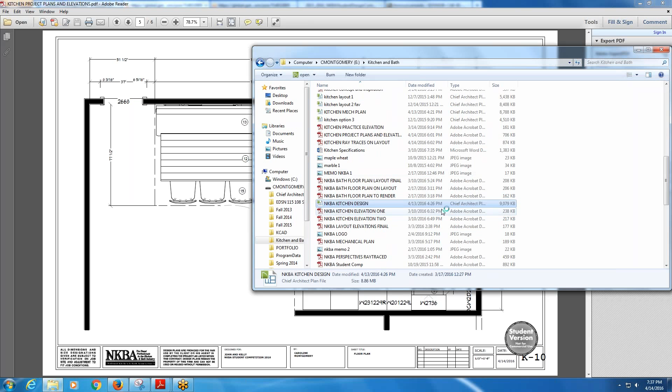Let's talk about what was wrong. Let's see, because I don't think we got to cover that because somebody was absent. It wasn't me. I know I have it on my laptop, so I could go get that. Oh, here maybe, I think I have it if you don't have it, probably saved as a submission link.

Okay, here we go. So this is where it was, and some changes have been made. So this originally was like 48 inches, so pretty much right here, and I shortened it to 36, so I don't know if that'll be enough room or still not, but with 36 inches it leaves 18 inches here, so I don't know, it still might be a little not big enough.

So I placed my sink here because I wanted it centered on this wall, and then I put my dishwasher on one side and my microwave under the countertop at 15 inches above finished floor, which Allison thought was hilarious.

So the problem is that I don't have 21 inches of standing space on the side of my dishwasher. So that made me have to reposition my sink so that I could allow for that. And my island was a little bigger, so then I didn't have quite 42 inches on some of the sides, so I made the island smaller to get that proper space.

And then this is my refrigerator, it's paneled front, and then this is my stove, obviously. And this is the longest triangle of the workstation, but it's not 9 feet, it's like 8 something, so it still does meet code.

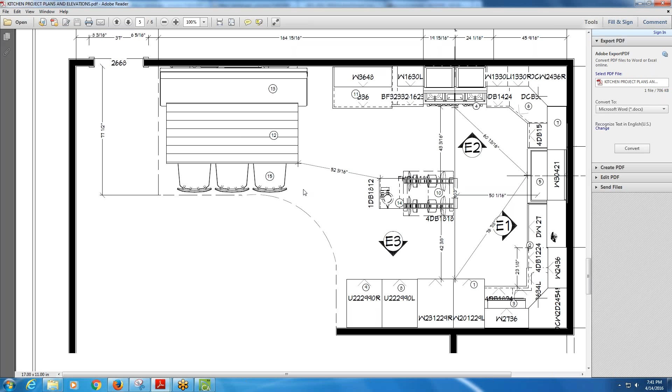Is that good, Allison? Should I move on to a different plan? Yeah. Okay, so then I have my mechanical plan, which really is probably easier to see if I open it because it has color, because I should have saved that one as color.

For anyone else using Chief Architect, since in the drawing standards the cabinets are kind of lighter, I saved my mechanical plan as a different file, and changed the default setting for the cabinets to be no fill, so that makes it easier to see the switch connections. I equally spaced my recessed lighting for the most part, and put it right on the edge of the counter because I read that was a good place for it.

Then I have a switch that connects all of these. I have a garbage disposal switch and GFCI, GFCI, GFCI, and then a light for my pendant that can be controlled from both sides. This is the wrong legend on this one, but I have the right one on this one. So there's my little legend for the mechanical plan.

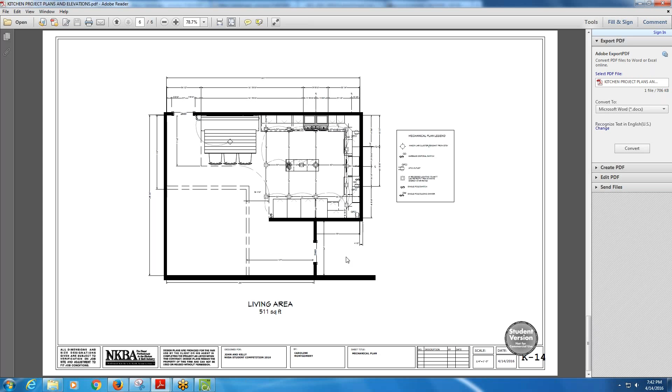So, to my elevations now. Here's my sink wall elevation, so you can see how it's uncentered. I think it's all right though. I have these floating shelves, and this is a mirror, so it looks like a window, but it's a mirror.

I thought that would be a nice thing, so it's not like she's just staring at the wall when she's doing dishes. She can keep an eye on what's behind her, and it kind of opens the space up a little bit. Then floating shelves, which would have accessories in them, maybe some cute bowls and mugs and flowers or something.

Then this is the dishwasher. I wanted both my other appliances to be paneled fronts, like to match the cabinets, because I have this blue vintage looking French range, so I didn't want them to conflict with that. The Lazy Susan, and then this is the cabinet that goes to the countertop, and here's the microwave.

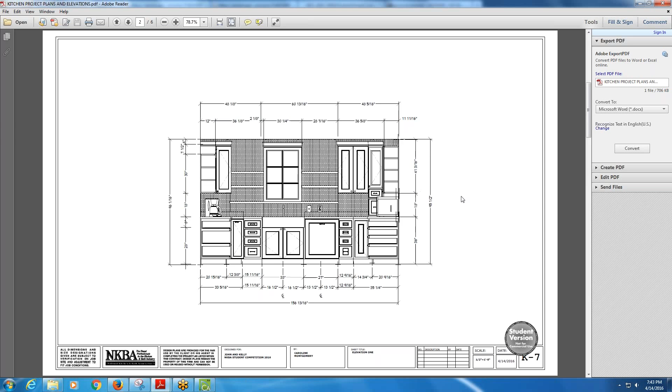Then here's my last elevation. Here's the microwave, so you see it's tucked in there nicely. And then this is the refrigerator, side by side. So I have it center-lined, and then I dimensioned the width of each door because they're not the same size.

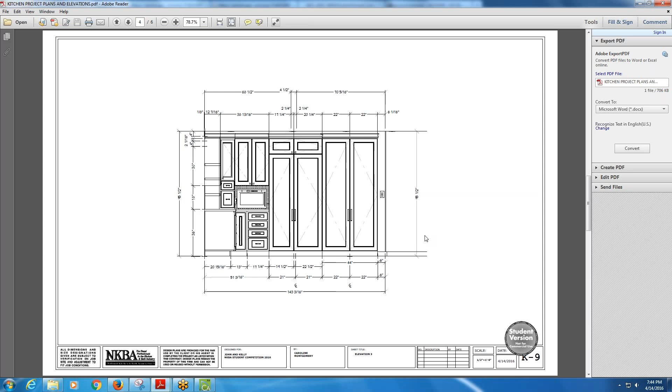And then this is my pantry. So one side would have shelves in it for storage, and the other side would have maybe just a couple shelves up here, so they could put a full-size broom and something like that, so they could have room this way, and then just shelves at the top. So those are my elevations.

Do you have anything you want to say before I move on to my perspectives? Nope, I think you're doing fine.

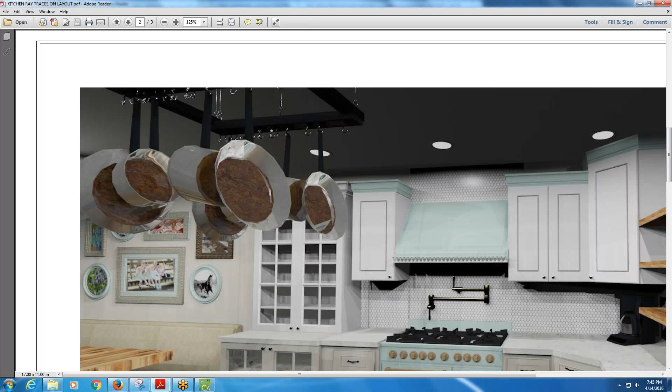So here's that view, and you can see the shelves, like some reclaimed wood to match the table on the island. And then I did a perspective floor overview ray trace, which I didn't know that you could ray trace this view, and you can, so that's really cool.

Yeah, I think it looks okay without the sink being centered. That really was bothering me when I thought, oh, I have to move this, but it doesn't look bad. Okay, so that's all I have.

I guess the only thing that you're missing is that they had requested the extra counter height seating for people to be at the bar, but that was optional. They said if you had space for it then yes, but if not, it was probably the last thing, the thing that could be cut, so that's up to you. But it looks good.

Do you think that 18 inches there is okay? It's better, but if you imagine it, I would say it's still really small. It's better than before, for sure. So if you have to change it—or I'm suggesting you change it—any type of change is better than what you had before.

Usually, even 30 inches is the minimum space we'd give to walk through into a space or between panels, or if you're really pressing code for somebody to get through, move past an edge by, 30 inches would be the minimum. But it's better than nothing. I mean, a kid could get back there, so at least you're giving another access point, but I'd say it's still cutting it fairly close.

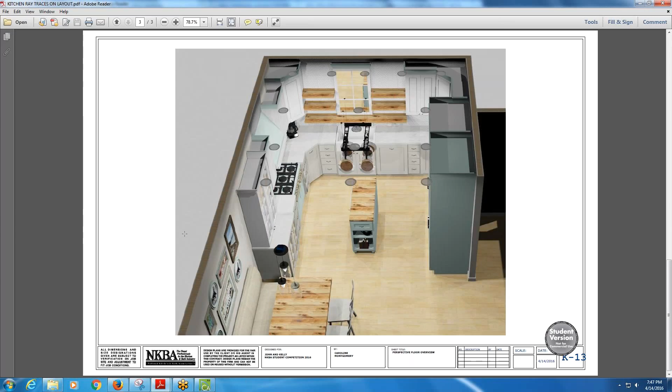Very nice, family photo. That was really clever. Then I have these random horses that just came in the frames, so I thought I'd put their photo in there. It's Schoolhouse Charm, it seems like they'd like horses - they literally do? I think so, they like outdoor sports and horses and things. So, very well done, good job correcting everything.

Let's see, I wanted to show you what happened to my SketchUp too, but I can't right now. Which student said that?

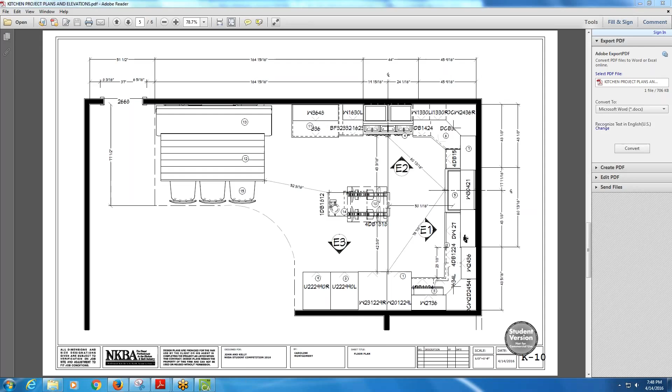Oh, Madeline. Okay, I was like, well that could have been any of you, almost. I emailed you back, Madeline, but if it was another email after the one I sent you saying - what was it crashing? Was it crashing from school or home? Oh, there's way more to this. Hold on. Computer can't access, can't open anything. All right, we can talk about it after class, but it's good to know.

I'm going to go ahead and let Gabe present next, since he had quite a few changes to make.

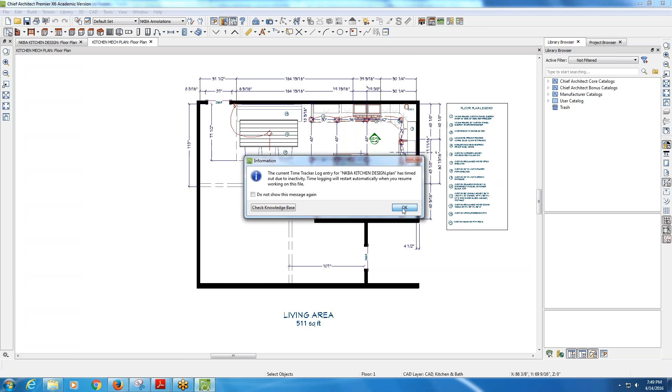Hey, what's up with your countertop in that picture? Does the hutch protrude out? It does a little bit, it's a little bit larger for some reason. If you look at this, but I could make it more shallow to match that. It doesn't have to, but there's another case - does it have a rounded edge and it's just not showing it? It does. Oh, it's so bad at that. Okay, well then I'm okay with it. As long as it's a rounded edge, it's okay.

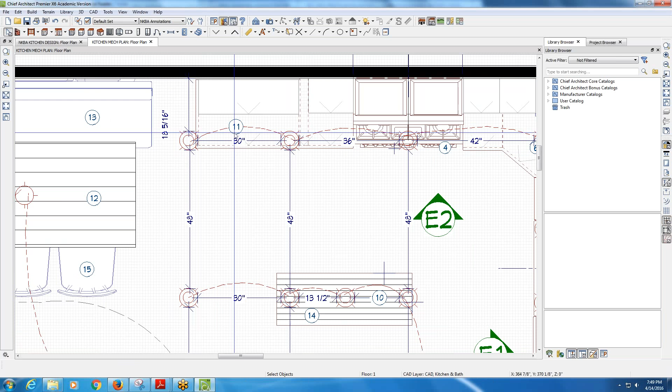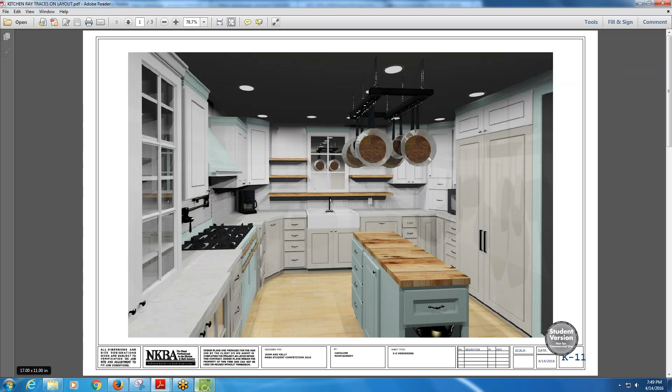Okay, he's going to use my headset. There's a bunch over here, but okay. Not, I even left mine. I had an extra. He's setting things up. You know Gabe, you'd think if you were efficient, you would have already been ready. True. All right, he's too busy doing his homework for other classes.

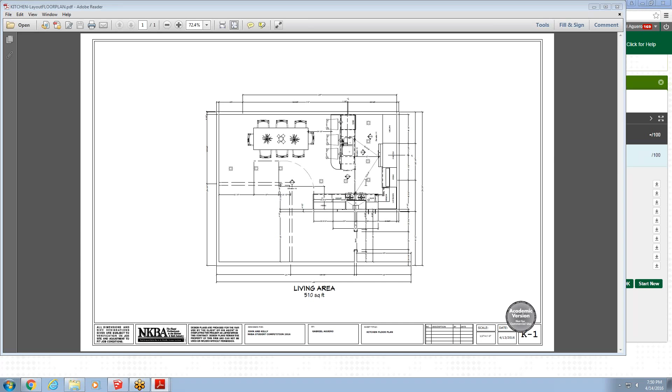Thinking, all right, lab people, let's see what you got going on. Look, he even has accessories on his table today. All right, let's see the changes and explain them slowly. Zoom in a little bit too for me - even I can't read that.

There's the picture, Caroline, the 15-inch minimum space. Oh, that is so dumb. Okay, what's going on? Just the rule about the microwave oven placement needing to be 15 inches above finished floor is ridiculous.

All right, Gabe, go ahead. Well, I changed the whole kitchen because you said so. That's good. Well, I used an L shape. It's considered a U shape, right? Well, a U shape with the peninsula.

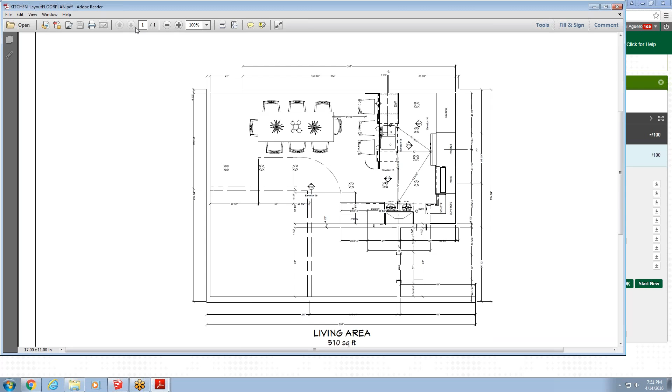So yeah, let me close it because I can't see, I'm literally blind. So you can see the triangle over here. They're basically like under the 90, 100 and something. Yep, you're good. Yeah, so I'm good on that.

What else? There's the dimension, the center lines. I wasn't sure if it was 39 inches with the chairs. Usually you'd want at least 42 probably - there you'd be edging by, I wouldn't see anyone walking back there. And you have open access on the aisle. You're all secretly cutting it real close with the chairs along the wall anyway, but I'll let it slide for everyone.

Let's see, for between the chairs, how much would I like you to have? So it looks like you're okay for one person at 32, 36, and you have 39? Yeah, you're fine. I'll say you're fine because it's secondary seating for the stool, and while it'd be nice to have guests up there, you could probably fit 2 people and have one person still sitting at the table, so I'll let it be okay. Thank you.

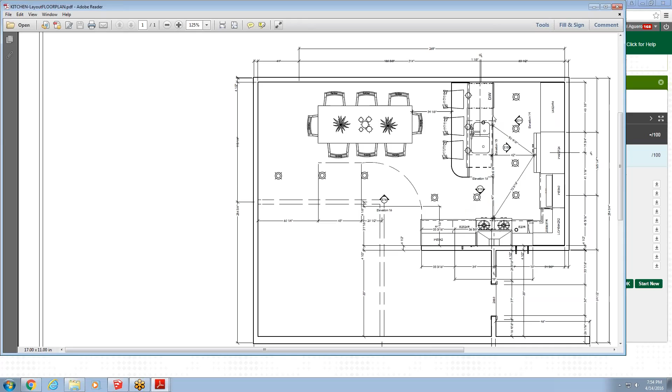Let me check one thing. And by one thing, I mean many things. Oh my gosh.

Okay, doors are fine. Triangle's fine. Separating work centers, you're fine. You don't have any tall items separating your work centers.

Where's your refrigerator? Remind me. Right here. Okay, yeah, it's not in the middle of a work center necessarily because you have the broom closets. You're okay.

Work traffic triangle, no, that's fine. 42-inch aisle is fine for the one person that's working back there. I'd say the 40-inch right there is cutting it close for right in the aisle to get into the kitchen.

Where it's 40 inches, well that's the minimum, right? I think it's 42. You think it's 40? Yeah, I read that it was 40 too. 40 also, yeah. Is Caroline joking that she thinks it's 40? No, she's not joking. Hopefully not. She is. It's 42. But anyway, I'm sure you can make one of those cabinets 2 inches smaller.

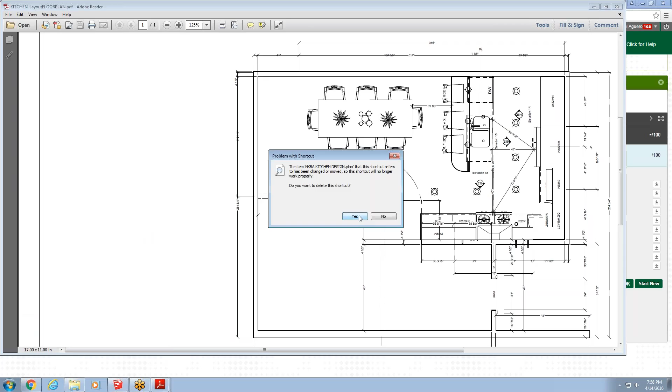If any of you want to look through the rules right now, or if you have anything that you feel—it makes it sound like a therapy session—but if there's something that you don't like about the plan, just note it in your folder.

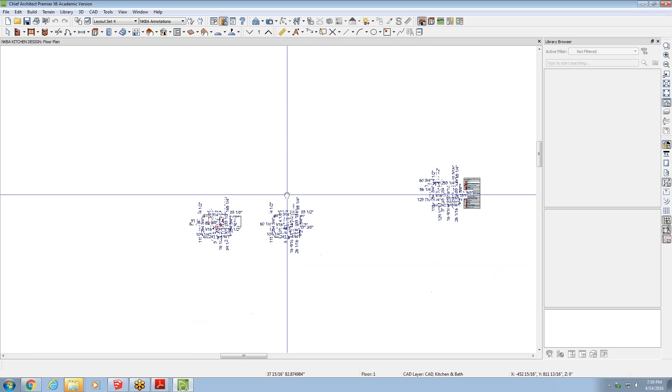While we're waiting for Gabe — Tim, you'd mentioned before that you can't fit everything on your plan at 1/2 inch scale, and Caroline confirmed that's true, especially with having a legend. So she's been doing hers at 1/4 inch scale, although for their competition I think they might allow that. They didn't specify an exact scale, but said if you weren't able to fit the 1/2 inch scale, another scale was okay. They just didn't say what. The 3/16 wasn't an option, so 1/4 inch is fine. Or maybe 5/16.

30-inch high — so is it counter height, Gabe? Or does it come up? Is it bar height or counter height? It's the Kerner — I can't pronounce that. It's counter height, so it matches the counter. Or does it go up a tier?

Let me see — yeah, you can see. So it's flat, it's counter height, yes.

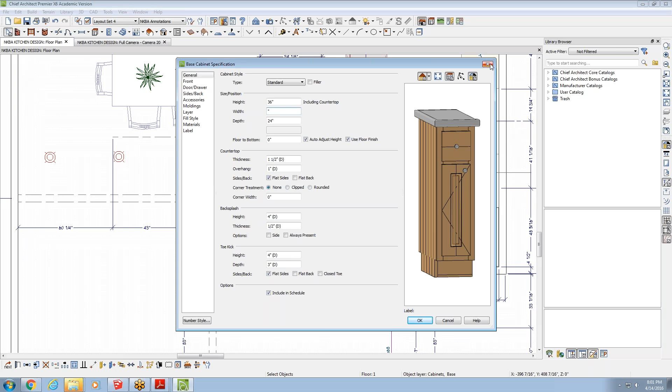I have a quick question. I'm looking at my refrigerator now — I'm doing that thing where I'm listing all my appliances and everything. I didn't know they had it, but there's a cabinet depth option. They have one that's 24.8 cubic feet, that's the French door one I have, and they have one that's 19.8 cubic feet — that's the French door cabinet depth one, which stops at the edge of the cabinet. Should I do that one instead? It doesn't matter — if you do the cabinet depth one, you have to worry about the spacing to the side of the refrigerator on the pull side. They're not concerned about that when it's not cabinet depth. Okay good, I'll leave it the way it is then.

Good, I have to do another ray trace. Yay.

Now what are you doing, Gabe? Oh, you're changing the size. So there's that little cabinet — so you have two of them? Yeah, one I think they changed for a drawer. I don't know what to do.

Looking at your drawing, I do think you have the wrong height stool — you have a bar height stool at a counter height. You could modify that easily. Really? Because it looks like they'd have about 2 inches for their legs shown. So it will actually be shorter, not taller.

I was looking at your dishwasher — you said it was not 18 inches. How many inches was that depth? 16. And there's 3 stools, 48 spaces, 30-inch high tables and counters — no, we're higher than that, 36. Allow a 24-inch wide by 15-inch deep knee space, so you're fine with that since 15 is the minimum suggested for that height. 24-inch spaces — I'd say you're fine with that for each of those stools. For 42-inch, allow 24 by 12.

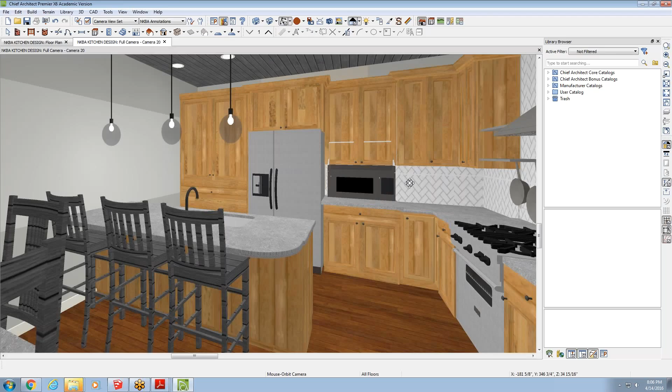No, seriously, do you want to see the picture? Sure, look - it's like a microwave, like something is hanging in the top part of this. Is it a vented one and that's the vent that's attached to it?

No, wait a second. Oh no, I will take that out then. I don't care, whatever it takes. Okay, yeah, so you're okay with that.

Where's your trash storage? Here, and in the end over here. I feel like that's really far away from where they're working, where their prep area is. Of all the things to be breaking, it's not the worst, but it is rather obnoxious to have to walk out there if you're cutting something up, then walk all the way to the very last cabinet every time you need to use the trash can.

But he could put it under the sink. I'm sure they are going to store lots of cleaning supplies underneath the sink. He does have quite a big cabinet to store brooms. What's the cabinet look like? Is it just a double-doored cabinet, or are there shelves in it? Does it tell you that information for the brooms?

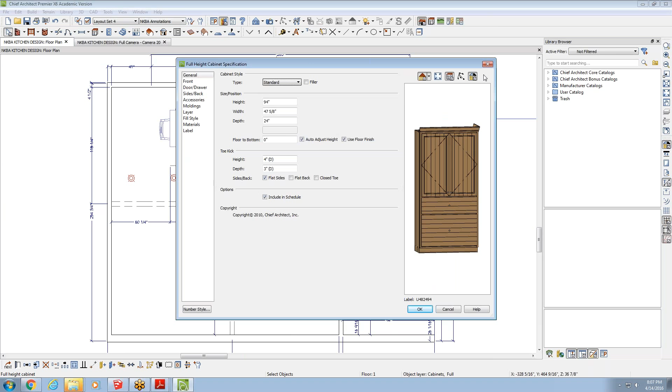Oh, you can modify it. Then maybe if you did modify that cabinet to have more shelves on one side and open broom storage on the other side, allowing you to leave the space open under the sink - although you're not going to have a very tall trash can with the pipes underneath it, you really won't have a lot of space. Right, but let's think it through.

What's under the sink by the refrigerator? Next to the refrigerator where the microwave is. It's just two double open cabinets. Yeah, you could put your trash in there. It's prime real estate, but it is prime real estate.

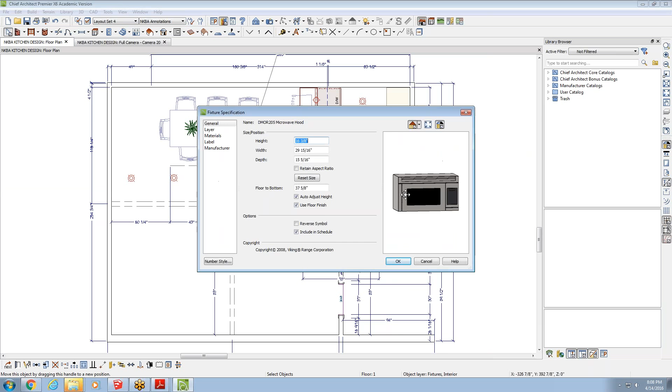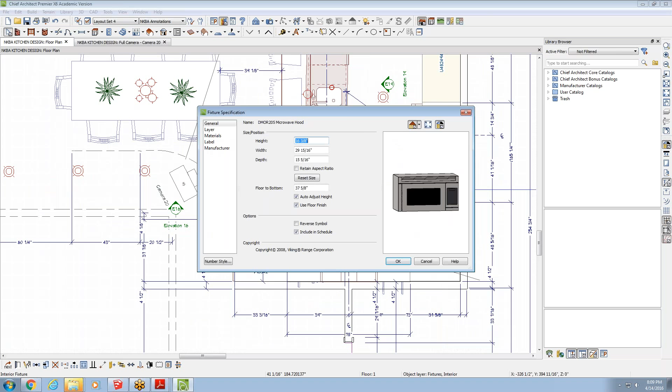One thing I'll be honest with you guys about: I do not have the time to sit around and count all of your drawers and cabinets and make sure that you're meeting all the codes. So for the most part I can tell just by how many cabinets you have within the space if it's going to be enough for the family size. This seems like if we devote that to the trash can, then we're losing quite a bit of usable space, because the rest is taken up with appliances in the base cabinet, and the range takes up a good amount of the space for the overhead cabinets. It wouldn't have a lot of storage.

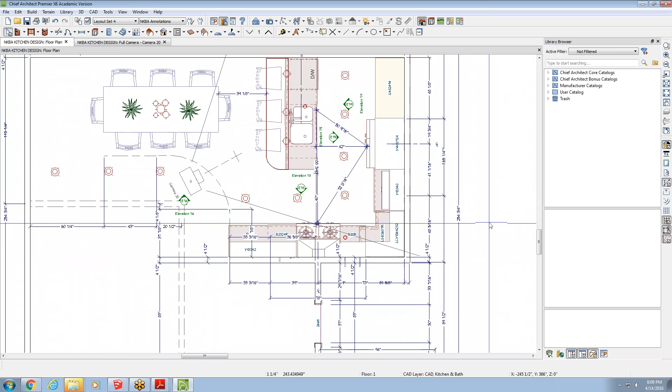I was saying you can check yourself and do all the math to figure out how many shelves and drawers you have, to figure out if you have enough space for the maximum size of your kitchen. But I'm not going to take the time to do that for everybody this semester, so I usually do it by thinking of it just logically - thinking about how much of your whole sink or peninsula area is taken up by an appliance, like this much is dishwasher.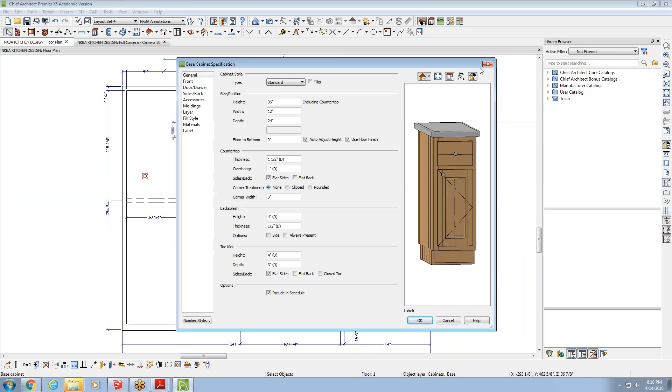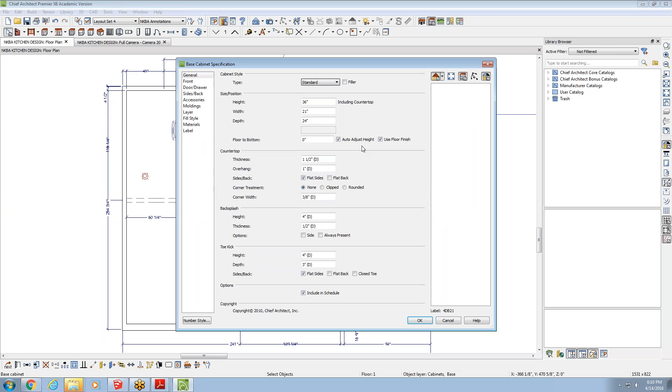Then what's next to your sink? Is it drawers? I would think you'd want some drawers. Okay, so you just don't know how to do that - that's okay, these are just suggestions, I'm not angry with you or judging you on that, we're just figuring out space. So if you don't have any drawers, I think you'd want some for spoons and utensils of all types. So we're going to want to add that in.

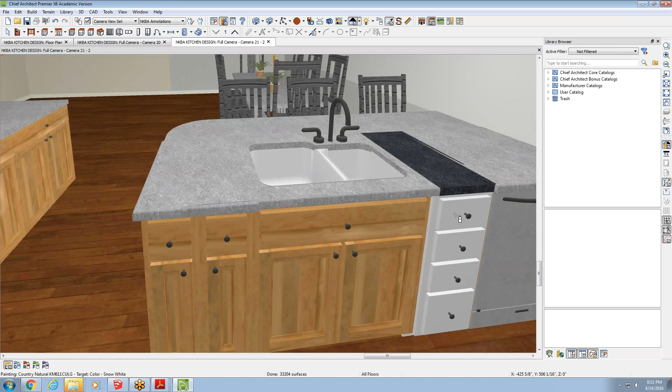But then, if you think about this peninsula, there's really not that much storage in it because you have the appliance, you have your sink, and then at the end you have two places for cookie sheets or trays, which, while necessary, I don't know that you'd store that many of. You do have drawers at the top - are they false drawers or really drawers? Okay, good, well at least you have drawers, so that's adding to your amount of space. But just imagine that whole island almost doesn't count as storage except for the drawers.

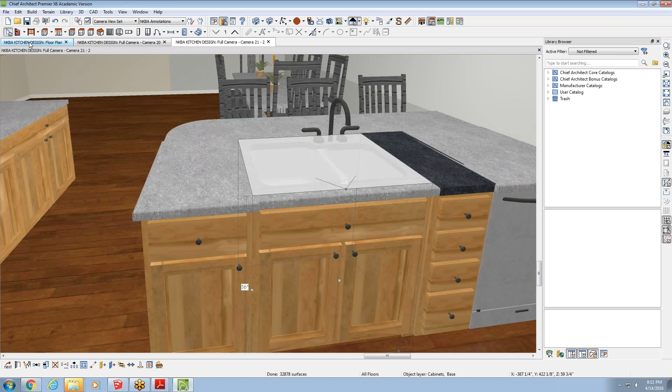Then on your wall you have quite a few doors on the bottom, but they're all towards the outside of the kitchen.

Can you give me an elevation of the wall that your oven or your stove is on? Speaking of ovens, they said if we have a range with an oven in the bottom, we don't need a separate oven, right? This one?

Mm-hmm, okay, I believe that was true. There's your vented hood, two doors on the bottom. I guess it's not bad. I'm not going to fight you over it.

So what's going on? Then you have shelves. Could you add, I know you're not going to love it, but is there space to add more upper cabinets in those empty spaces by the... here? Yeah, oh yeah, yeah, I can do it.

Does anyone agree that for the size of the kitchen and how much is taken up in the usable work triangle, he might want some more storage in there? Or would you leave it aesthetically as it is?

I'm going to call you by name. Tim, what do you think? I don't know, I'm still trying to decide whether it would make it too crowded, because I think it would. I don't know, it would change the aesthetics. I kind of like it open. Okay.

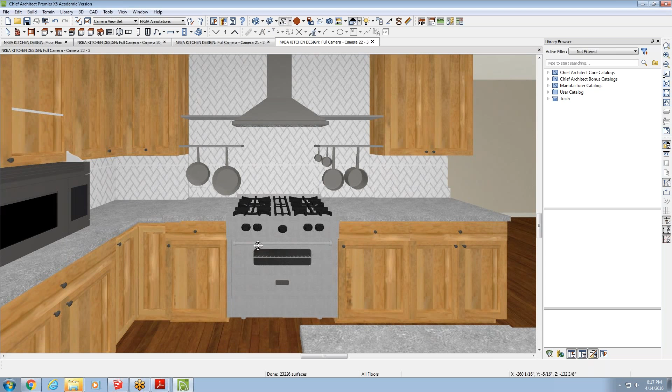So you're okay. Now go back to the other view. Why did you guys screw me so bad? No, you're doing well, look how much you've improved. Really, we haven't changed much at all.

At least 30 inches of clearance is required between the cooking surface and an unprotected combustible surface, but we have a hood, so allow 24 inches between the cooking surface and a protected non-combustible surface. Perfect, you're fine, you have 26, you're okay.

Cooking surface, ventilation, that's fine. Nothing with the window. Your microwave sitting on a surface isn't ideal, but if you have to break one, that's okay—it's better than 15 inches above finished floor. So, microwave landing area, yours is sitting on top. Provide at least 15 inches of area above, below, or adjacent to the handle side of the microwave oven.

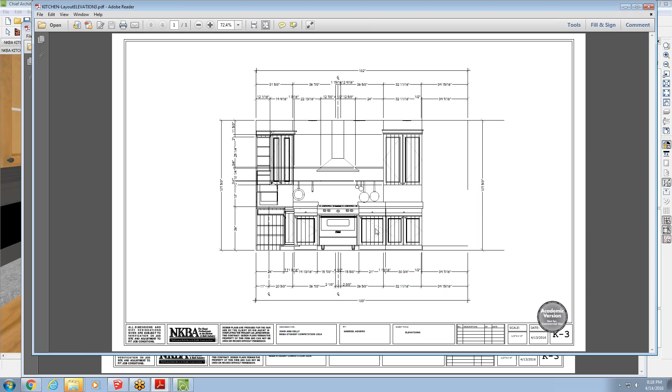You want to see the elevation for that? Hold on. 18, I don't know—oh yeah, you're opening out that way towards. I think you're fine.

15, oh here's the sit-on-top. Yep, there's the 15, there's your thing. You're fine.

Combining landings, try not to concern you with that. 36, 36.

Okay, a total of 158 inches of countertop frontage, 24 inches deep, with at least 15 inches of clearance above is necessary to accommodate all uses. So 158 usable counter.

You have 36, go back to your plan view for me. For plan, right? Yeah, so you have 36 and about 24. You're really 60. You don't have a ton of counter space, but it's okay.

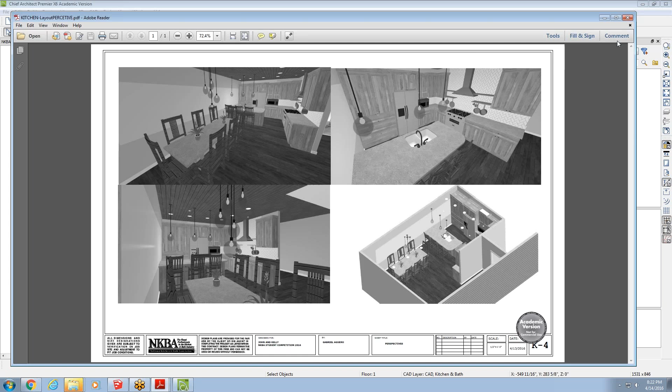I like your ceiling. Alright, yeah, I switched to wood instead of the wallpaper or ceiling paper. Yeah, it gives it more, it looks better. I don't know, it looks better to me. Yeah, very nice. Okay, well, let's see.

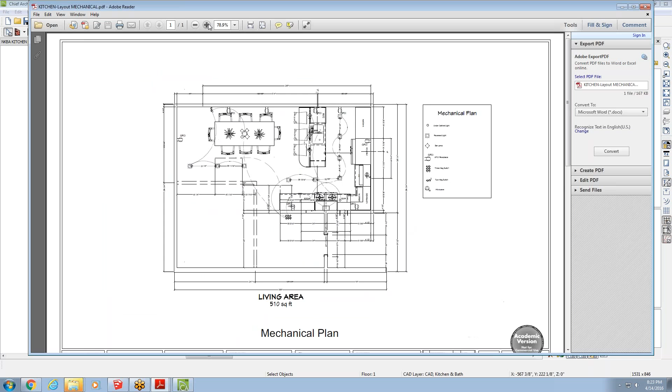Where's your mechanical? Let's just check your lights. The other one we didn't get a look at—we looked at everyone's last week. So there's your S2, did it prompt you to do an S2? What's that, where it says two-way switch?

Oh yeah, so there you're going across. I don't understand what the two-way switch is doing, is it just me? Oh, you don't know what it's doing? No. Oh, it's going for the chandelier and then the 3 for the hallway. I don't know if you had to do those the whole way.

Well then how is it going? So the chandelier in there, and then it connects to the other one? Yeah, because this is a 3-way, so it's going through to the chandelier. The same, the 3-way is going to the chandelier as well. But I don't know why it looks like that.

I don't think it... did it automatically do the S2? Okay, I think it's an S3, and it just seems weird. I was just having this discussion with Kayla at work today that no one really knows when to use the S2. Anyone know when to use the S2? I don't even know what that is.

I'd stick with the S3, because an S3 has two circuits that you're switching back and forth, and one that it can switch to when it's not in use. So the S3 is what you want in this situation, where you have one switch on one side of the room and one on the other.

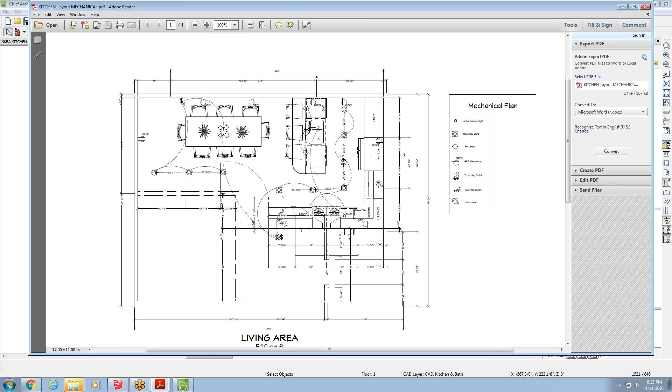You've got the ones in the middle of the island—where are those being controlled from? For the three-way over here? I don't see them connecting. Can you zoom into that? Oh, they're not connected.

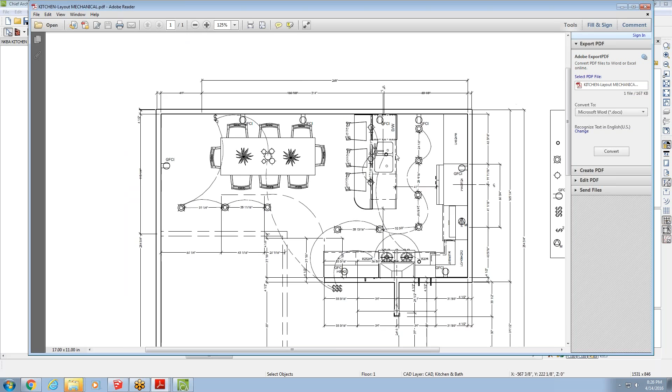Alright, go ahead and... switch on the one by the island instead of behind it. Because they'd have to go back between that little tiny space to get back there by... you mean on the cook side of the island, a switch, or on the seated side, Caroline? Yeah, I feel like I'd like it in the seating area.

No, the seating area is fine. We're talking about why wouldn't you put the island lighting switch by the island, so if you were sitting at it you could flip it on somewhere in there. I don't know how often you're going to walk back behind there to flip it. I feel like that would be one of the first ones I'd flip when I came into the room you're at right now, just turn them on or off maybe.

What I was thinking is connecting the two lights that are here, like by the stove, and Caroline told me this light isn't necessary so I'm probably going to take that out. So it connects with those—you'll end up having this one, then all of those, around to this guy and then all of those. Yep, okay that's fine, just connect them.

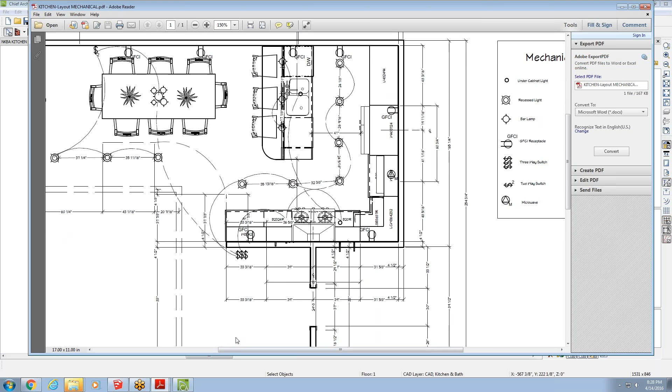Let's see, other than that, I see how that's connecting. We fixed that—I think we've beaten this one into the ground, Gabe, we can move on. Finally, I do something good. You did, you did good. That's what space planning is all about, working through all the different situations. Awesome, and getting your money's worth.

What is that, the current time tracker log entry? Chief Architect will log how many hours you work in there.

That's really cool. You guys should have that tracker for your homework, and then you could send me a file that says... you'd probably sit there and just shake your mouse while you watch television. I spent 17 hours. I know some of you do, though.

Sound good? You're good. I'm going to call it. Right, good. Bye. Just, 1, 2, 3, 4, 5, 6, 7, 8.

I think you're cheating with the chair on the end there. It probably goes past the boundary line. This guy? Yeah, I bet that's past that dotted line that you don't have shown there, towards the door. I'm just saying.

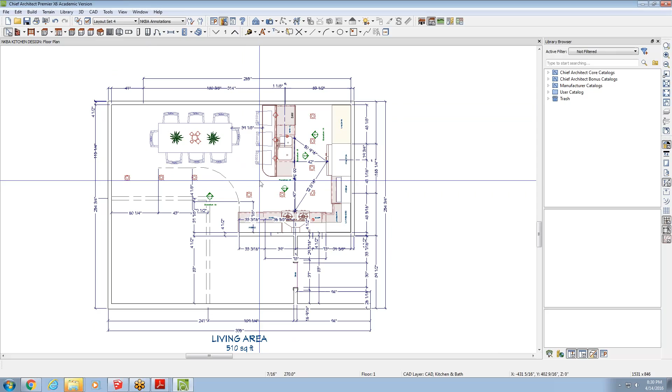I think it's definitely, yeah, it feels like a Monday. But anyway, yeah, I got a case of the Mondays. Maybe it feels like it should be Friday. All right, we'll move on.

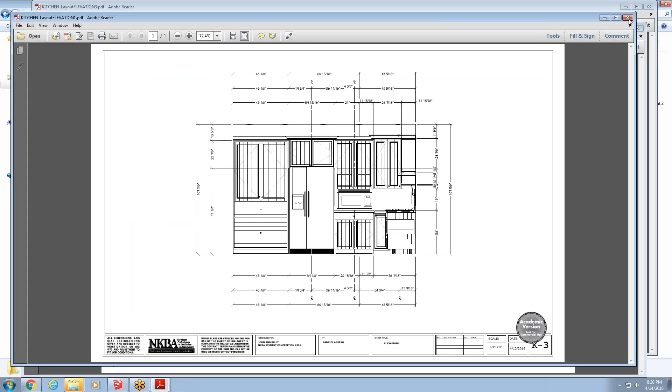Madeline, do you have anything that you've worked on since we talked last week? I know you've been having some issues with your computer, and I know that was more SketchUp, but do you have anything that you've hand drawn, or how were you trying to draw? We were still hand drawing it, correct?

Did you have anything you'd like to share, or do you want to wait another week? Okay, that's fine. Let's see.

Tan, did you make many changes? Yes? Okay. Did you want to share some of them? I'll go ahead and give Tan the presentation rights. Tan.

You don't have to, there's another set. Those are nice and warm already. Oh boy.

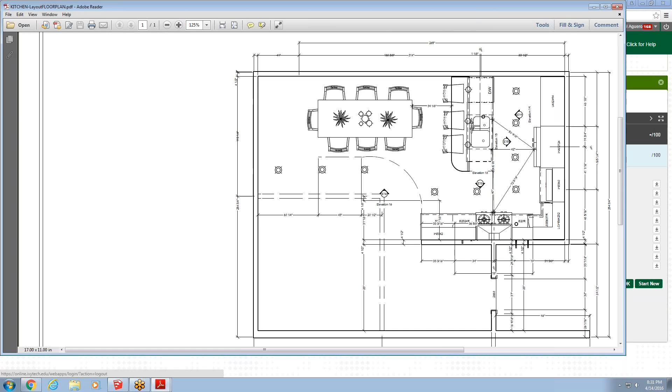There's Tan's layout. Oh, those are interesting. I like the drawing you made with your mechanical lines.

I cannot hear you, Tan. I think your mic is muted. I still don't hear you. Does anyone else hear? Cannot hear you.

We will get there, everyone. Thank you. Perfect, kind of. Alright, okay, we can hear you now. Hello, I'll show you my plans.

I have some problem with, hang on. First is about guideline. Number two, like the door. My outlays and door might touch each other, so in order to avoid that, I...

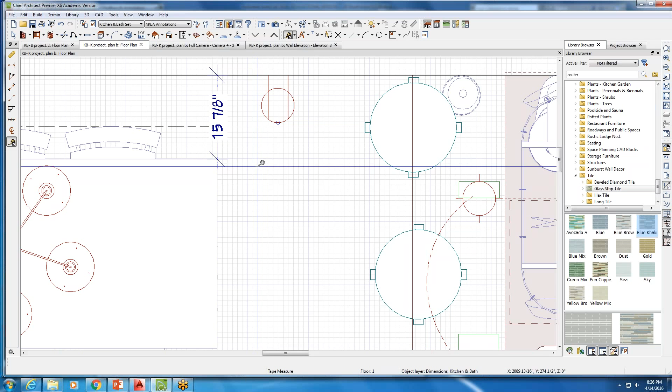Right here, the distance between the chair and the wall. Yeah, that's the one where I said you're all breaking that rule, pretty much. I have 15 inches for now. That's definitely not enough space.

If I was all of you, I would take my table and move the chair all the way back to that dotted line. Like this? Yeah. I would not worry about the fact that that's in the walkway, because when you're seated there, no one's walking by necessarily. You're having a meal as a family.

I'd move it more towards that dotted line than towards the wall, because that's empty space that's kind of malleable and constantly changing, as opposed to the wall which is always there. You're always going to have to be scooting your way back there, but the space behind the chairs on the dotted side could possibly be open all the time at any moment. It's only when people are walking through.

So if you have to break that rule and kind of impede on the walkway a little bit, as long as the chairs are pushed in, they're not passing the line technically. I wouldn't count the space for the chair into that as much. I'd push your table back still a little more towards the wall, but if that's 15, I'd give it at least 30 inches to get back there.

Well, right now it's 27 inches. Okay, so that's better in my opinion, but it is so much space. I know.

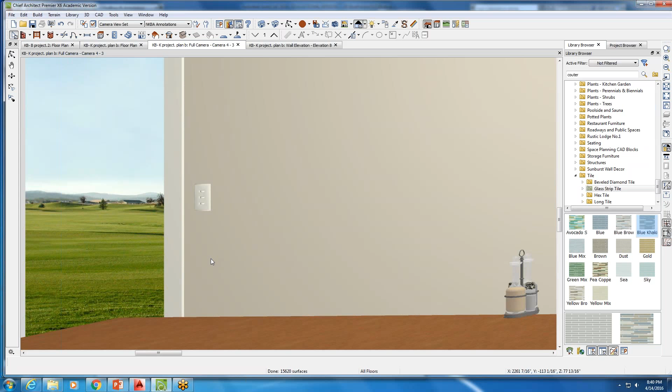You don't need to come out this way. You would put the switches side by side on the wall, not stacked out this way. So you'd stack them side by side instead of down. I have it like this. Oh, so it comes in that way? That's interesting, I've never seen it that way. All right, then I'll count it, I'll see it as a viable option. If it comes in as a block, then I'm assuming they know what they're doing.

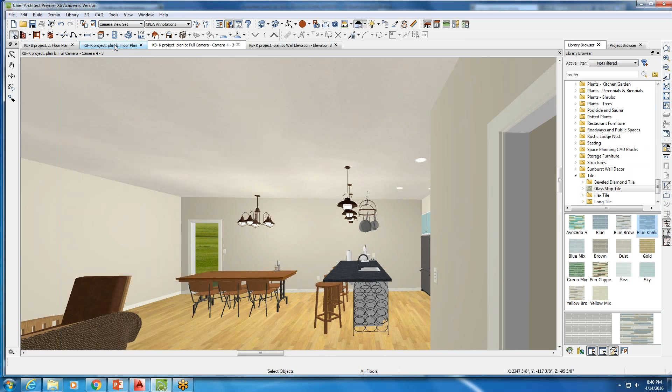Okay, what, there you have a wine rack? Yes. I guess, yeah. The main thing you're missing—so you're good that you have extra seating as the bar space, which some people are missing—but you are missing her china cabinet, which she does ask for. So if we could figure out some space for that, or a display cabinet, maybe in this space. I have a little room right here.

But there's a door on that wall. That was the wall where nobody drew the door because they read the packet and it didn't tell you exactly where the door fell, but there's actually a door right about where your camera is. So there's a door here. And oh, no one can see my screen. There's a door where it says camera on her screen, and then where the chairs are in the living room, there's two windows, one on each side of that chair. So there, you can't put anything down there.

But you're also, for the competition, stuck within that dash line. You're not allowed to come out of it for any of your furniture. But if you could plan it, like I said, the cheat around it would be just to make one of those upper cabinets glass, or to make them all glass, if you could find a cabinet you like to look at.

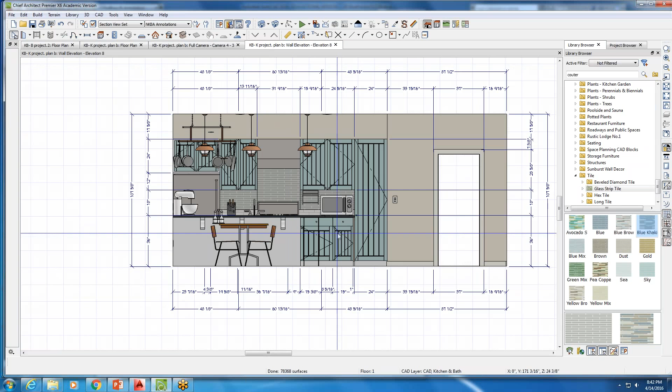You have plenty of space with your sink and your range. Your microwave has 15 inches—is that accurate? How many inches are between your range and your microwave? About 15 inches. Okay, I see, yeah, 15 and 5/8. All right, you're good.

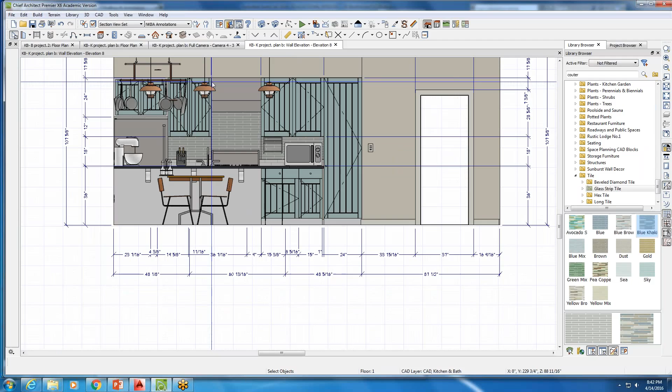And then, I'd say for your elevations, I know that if you're going to turn in your final elevations for the project, while this is pretty, I would want the dimensioned ones to be in black and white, and then a separate set that are in color and dimensioned, or just in color and not dimensioned.

Okay, can she do that? Yours are like that, correct, Caroline? They're in black and white. Yes, when you put it to the layout. Yes, they want to.

With the elevation in Chief, once you send this to layout, it'll still look in color, but when you save it as a PDF, you can choose whether it's in color or black and white. Just uncheck the print in color box, so it doesn't print any of the background colors, it prints it as a line drawing.

It looks like your oil and vinegar are teetering off your table. Because she moved the table. Oh, okay.

Gabe said it's not that funny. What is in the space between the two upper cabinets? Is that a hood then that's rectangular, a vented hood? What is this right here, Ton? It's the hood. Okay, it just looks so contemporary, I couldn't tell.

All right, yeah, I like your colors. I like your paints and selections, and the wireframe chairs.

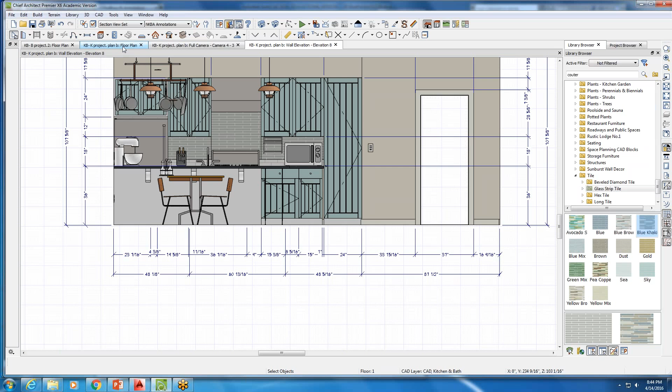Go back to your plan view for me, please. Yes. So your switches are fine then. We talked about that, you have a three-way switch. I just don't know that you need it. What does the third switch do? I was thinking if I can do three-way switches.

The three-way switch like we talked about in AutoCAD, where it's a switch over here and it turns it on and off - what do you want to turn on from where, and from here to here, or how are you going to use it? Because right here you just have two things that you're switching. In reality, you just want these on different switches, or do you want these to turn on at the same time? Is that what you're doing?

I want this switch right here gonna control the light here. And the switch right here gonna control the light in the dining table. All right, okay.

They're really far apart, but I think what you need - can I have your mouse? Yes. And I think I figured something out the other day about this. Where was it? There's the chat. I swear I found a draw tool the other day. It's gonna drive me bonkers. Okay, I have the mouse.

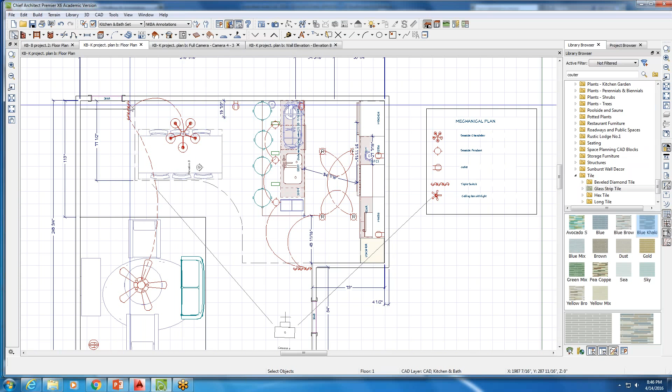So she wants this switch here to control these lights in here, right, Ton? Yes, and these lights. Is that right? The other one, and this light? Or and these? No, the switch right here will control this one as well.

Okay, so you could either turn this off from here or here. Yes. And then you could either turn these off from here or here. Yes. All right, so I think what you need to do then - and I really do know there was a draw tool somewhere in here. There's an option for more than the mouse.

You need to follow my mouse. So I'm going to draw a line from here to here, to here, to here, and then to the switch, so they actually connect. So you can see how that switch controls this, this, this, this - big connection over, and then up to here.

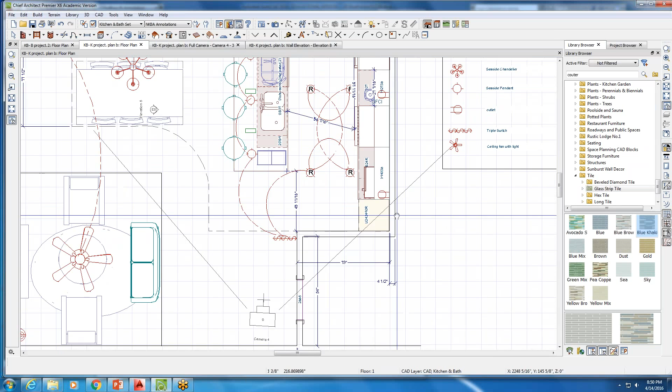And these are ground fault. This needs to be a ground fault circuit interrupter as well because it's in the kitchen area instead of a plain one. This one's fine, and your fan is fine. How about this outlet in this area? That one would be a ground fault circuit interrupter as well. Anything in the kitchen area, I would just make it that, even if it's far away from the sink.

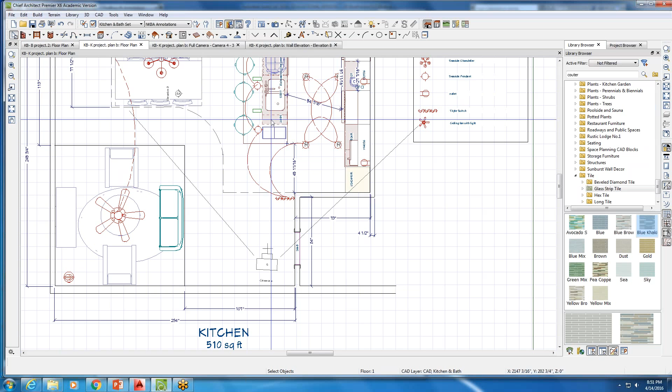I would. Okay, so next by the sink, I have a little small cabinet, 9 inches wide. Should I just keep that or make it like a fill? I would keep it, like Gabe said, for trays and things that you could store.

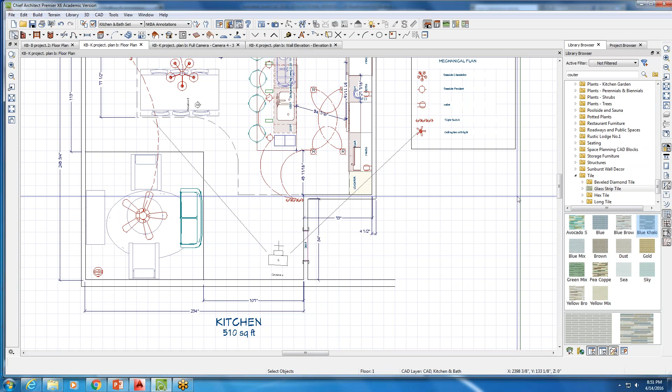All right, 8:51. I'm going to cut you off then because I think we've really covered for the most part what you'd need to change or fix. And Tim, I think you're fine. And Nicole Catlett, I think you're fine. Madeline's still working. Everyone else has presented.

So we're going to go back in time to the packet and review. Let me pull up my kitchen and bath.

We should all look at my really old SketchUp model of my bathroom intro and see if it's like a good bathroom or not. The bathrooms really aren't as hard as the kitchens.

Ivy Tech kitchen and bath. It's your favorite time, guys. It's packet time. So we're going to go through, find session 1, the drawing standards.

I don't want it like this, though. I want to open with Adobe Reader. All right, so much better.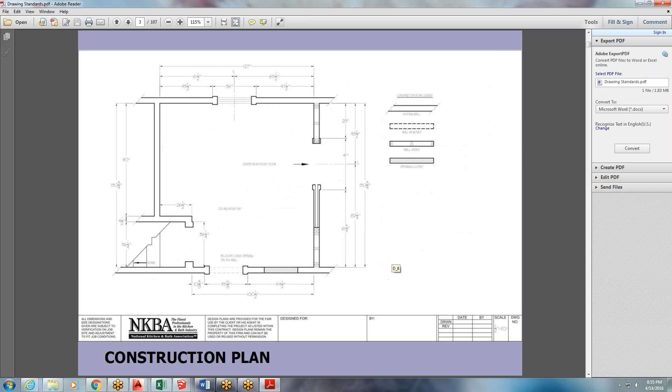Existing walls are solid lines, striped with thin lighter lines for something else, and blocking symbolizes studs for the wall being added. Wall removed is shown as dashed. That covers everything that could fall on the construction plan, so if you've done any construction, that's what's needed for homework this week, along with the construction plan and mechanical plan.

Center lines - here's what's missing from a lot of your mechanical plans, the center lines. This is what I was talking about on Ton's, she was missing all the dimensions between each of the light centers, not line centers. And here's the dimension to the cabinetry that I was talking about.

Ton, did you have all your exterior dimensions? Keeping with the floor plan dimensions of the openings - was that all on your plan? For the mechanical plan, did you still have your exterior dimensions that showed your openings and overalls? Yeah, I still have that. Okay, I just didn't remember it.

I trust you. And then here's the switch that you can see they do from both sides - here's that three-way switch where it goes around and does all these lights, then it goes to the other side, so you could turn it from here or here. They connect the two.

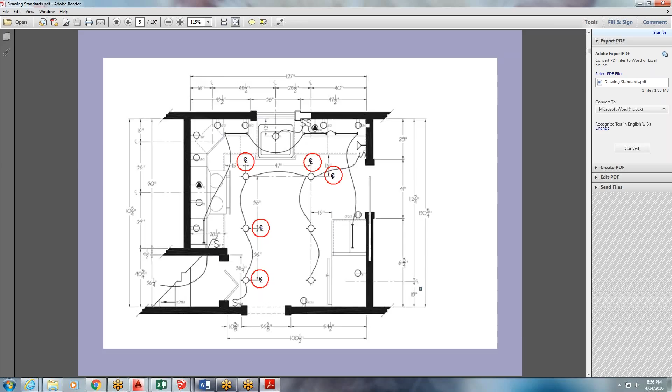And then here's the elevation - I said I want it in black and white, and dimensioned. Caroline said she could help you with that in the layout.

Is this a feature in Chief Architect to do the elevation symbols? Because really we should have elevation symbols on the floor plan and in the plan. I could make a note of that as a follow-up for us to do on all our plans if it's not already. I think there's probably a way to do that in Chief Architect, and if not you could probably make it up with a circle and text and lines. It puts the elevation symbol on the plan view, and when you send that to layout, it says elevation 1 under it, and you can either suppress that label or leave it. I can look into that and tell you next week how I did it.

Madeline, it only needs to be in pencil for now, and then for the final, once we're sure it's the layout you're going to choose, and we've given you a better review as a class, once you have more, that's when you'll ink it for your final presentation.

Notice, Madeline, that there's thicker and thinner lines. The detail work is thinner, the overall exteriors of the cabinets would be a thicker line. Things closer towards you are thicker, and things further away are thinner. So there's a whole bunch of rules with line weights.

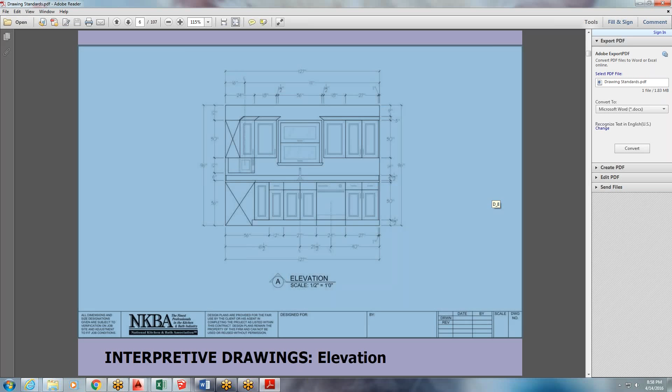And here's more examples, here's their elevations. Most of us have gone to digital programs now.

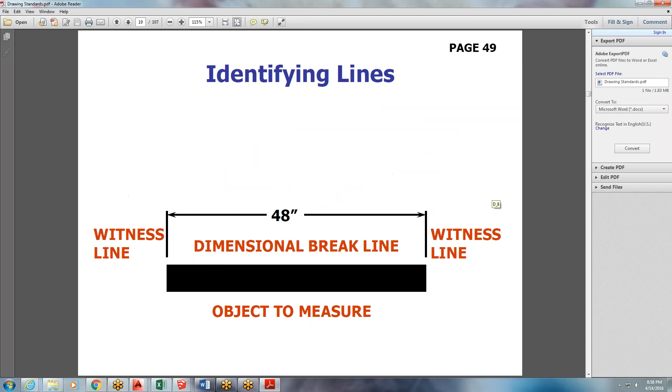Countertop plan you're not doing - I just want to make sure we're not missing anything. Really, guys, I think you're pretty much caught up. What I'm going into next week is, for this week it's just a construction plan if you need one. I'll post that tomorrow, if not tonight when I get home, but I doubt it'll happen at 11 o'clock. And the quiz for this week - you don't have any. You guys are actually done and caught up with all the quizzes.

I don't know if that's a good thing or a bad thing. Quizzes are such a great way to raise everyone's grades - or lower them. Yeah, so or that lowers them. I guess this class does have a harder one. But I still need to talk about that - it's not over yet. Let's talk about the goofy quiz and make sure I get caught up on all my follow-up while I'm in here.

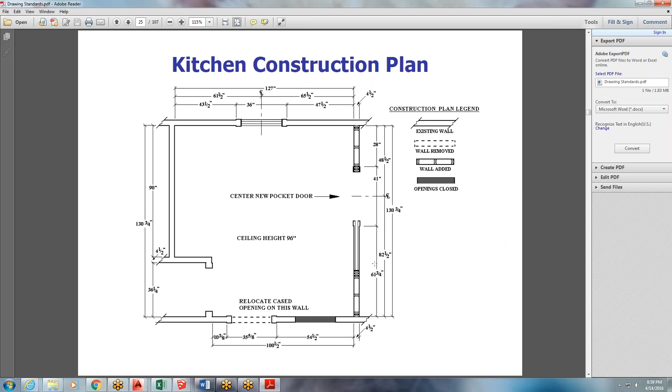Here's a better construction plan that's clearer to read. So if you added any type of pocket door where there had been a swinging door, walls added, removed, or existing - but only if you need it, you're not going to make up a construction plan. Top view, elevation view, plan view - those are details.

Okay, I think we're good. Not going to read through this again.

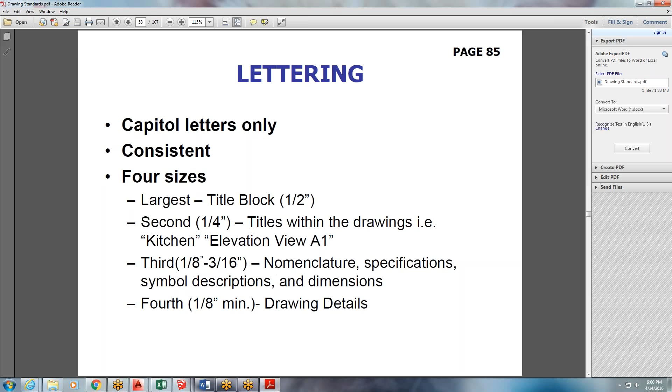Oh wait, Madeline, here's lettering information - making sure the sizes are correct when you're drawing by hand, that the title block is 1/2 inch and then 1/4 inch for titles, and the specifications and symbols are 1/8 to 3/16. These are all good things for hand drawing.

But yeah, this packet is a winner. Okay. Ooh, I didn't realize they had everything in here too.

Centerline all appliances. I think I've checked that on all your stuff. Haven't gone through this guy in a while. We're good.

Okay, let's check this crazy quiz out. Was it number 7? What was it? Anyone remember specifically which quiz? I don't remember from my email. I have a follow-up page set up. Where is my Blackboard?

No, you may not redo all the quizzes. Okay, I'm going to turn the screen off for a second as I find someone's quiz. You guys let me know. So I'm thinking it was the one about LEED, which means in the grade center it was environmental for kitchen, was the weird one. Does that sound accurate?

You guys are so quiet tonight. It's very bothering. I know Nicole is sick, so she is not held responsible for being quiet.

Come on, it was last week, I think. Did we have a quiz last week? Submission, you didn't last week because that was when I was in Florida. The week before that, so it would have been kitchen layout concepts, mechanical plan, critique.